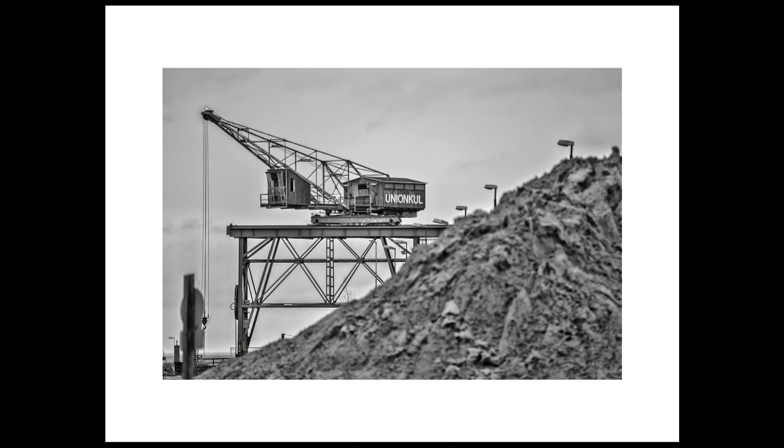Our own office started because we were biking around Copenhagen. Copenhagen is a very bike-friendly city. It's flat like a pancake, and we go around trying to sneak up on new places, what's happening, what's the potential out there. This picture is like four or five years old. And this place is the biggest industrial harbor we had in Copenhagen.

It's called the North Harbor, and all this shipping started to shift away. So it stopped as an industrial area like ten years ago or something. There's very little shipping going on here now. And in 20 and 30 years, all of this will be new urban development. So it starts down here, and you see the corner of Copenhagen in here.

You see the density of the residential areas in here. This will spread out over the next 30 years, with 40,000 people living and working out here. But in the meantime, there's this gap, there's this pause, there's this question of what's going to happen out here.

And what we did was that we called up a guy who's now our client, and we said, you got a shipping company, but no ship comes in anymore. We got an idea to put on your ground. He had a lease for the next 15 years on this ground.

We got an idea to put up temporary office buildings for the next 15 years. So instead of piles of rock and sand, you'll have creative offices put up there. And it sounded interesting for him, and it sounded interesting for the planning authorities of Copenhagen.

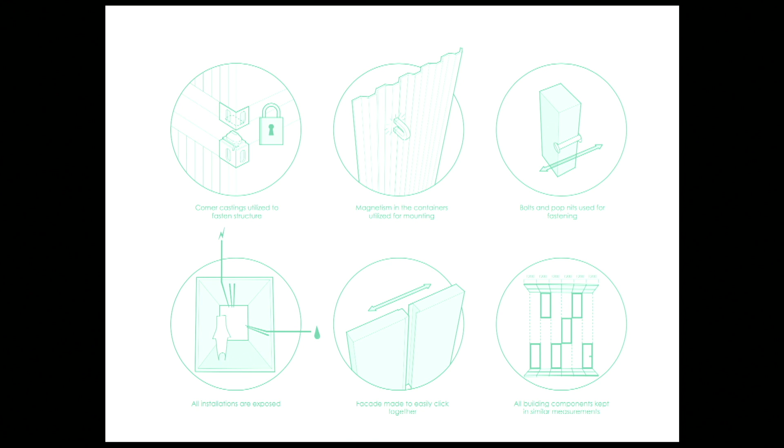Here are some of the features that we use. We use the already optimized interlocking system that you got. It's the same way you lock them on ships or on cars and trucks. We use the fact that it's all metal, so we got the magnetic features, so we can use magnets as mounting when we build. We bolt everything together instead of welding, so we can take stuff apart like a bike.

All installations, utilities, water, electricity are visible within the building, so it's easy to take up, it's easy to maintain, it's easy to take down, and it's easy to reuse. The facade is a click-on system. It's basically the way that you put up a wooden floor. So when we have to move the building, we can take it all apart without destroying it and reuse the facade again.

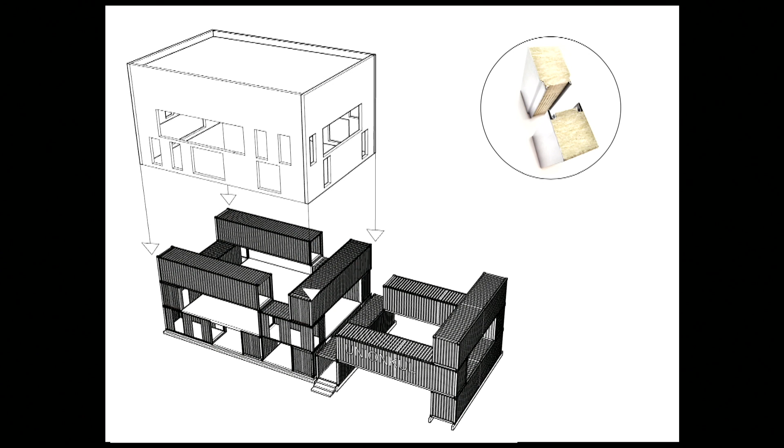And this is a picture of the building when it's the raw structure. This is basically how the whole of North Harbor looked 10, 15 years ago, only they are stacked in a little different way. And here is a diagram telling how the building is built up. So this is the stacking of it, and you have to think of the container as a load-bearing beam.

So this is how we get all our forces down to the ground, but the beam, like a steel beam, is so big that you can go into it. So it's also a room. And what we do in between the containers is that we put out a slab, like a deck, so we get big spaces in between, which is suitable for office spaces.

So we get big spaces where people can sit together and interact, and we got little spaces where you can have a one-man office, you can have meeting rooms, you can have quiet rooms, you can have the server room we got in here, you can have the kitchen, you can have the toilets and so on in the container.

And then what we put on up here is, this is a picture of our panel system. This panel system is made originally for refrigerated warehouses, so it's very cheap and it's very, very well insulated, so we get a very low energy consumption on the building, so it's very energy efficient, and it's very cheap because people only think it's used for warehouses.

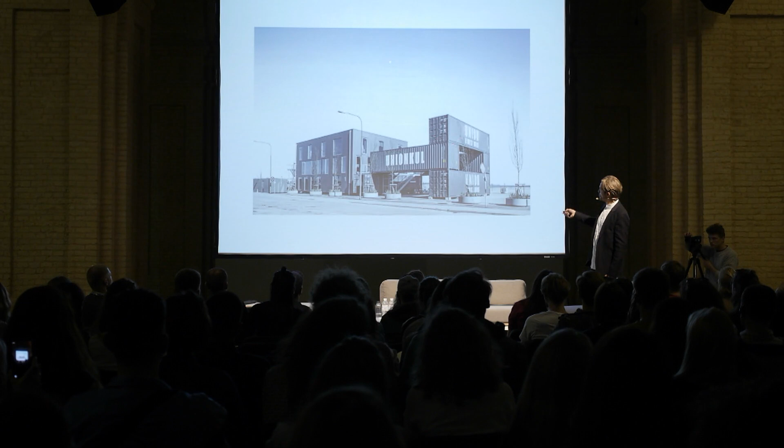And another thing is that two people put up a facade in a 3-story building in one day. So it's very rapid to put up and it's very rapid to take down. And this is a picture of the building when it was finished. So this is with the cladding on, and this is mainly like a show off. We use this for storage and whatever. And today, in fact, these two are insulated on the inside, so people also have offices in here.

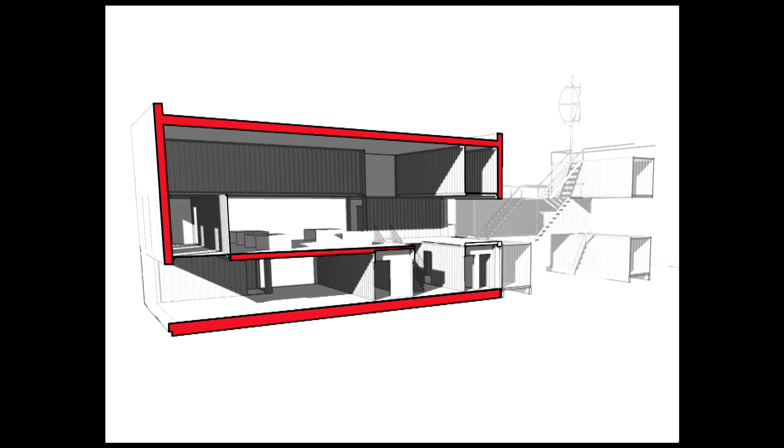But what is very important as an architect is not to be carried away with the system and what the system does, but to remember to make spaces that are lively, that are interesting, that make people want to go to work there, that give them joy in their life, give them a sense of meaning and inspiration and so forth. That's our first and most meaningful task as architects.

So what we did here is we tried to make different spaces, different ceiling heights, different cross views through the building. This is a section of the building. And I'll just show you some pictures from my everyday. I'm sitting up here. And there's another office sitting here, and you see the different ceiling heights. You see that we got a connection to each other, even though we're not the same company.

Within this, there's different kinds of places in the room that you can go. You got a meeting room in here. You got a quiet room over here. So it makes different kinds of moods in there. This is the common space, which is also the stairway of the building, and this shows how these different rooms and offices are interconnected with each other. So you have the feeling of the whole building as a living organism, even though you are only maybe a 2-man office or a 20-man office.

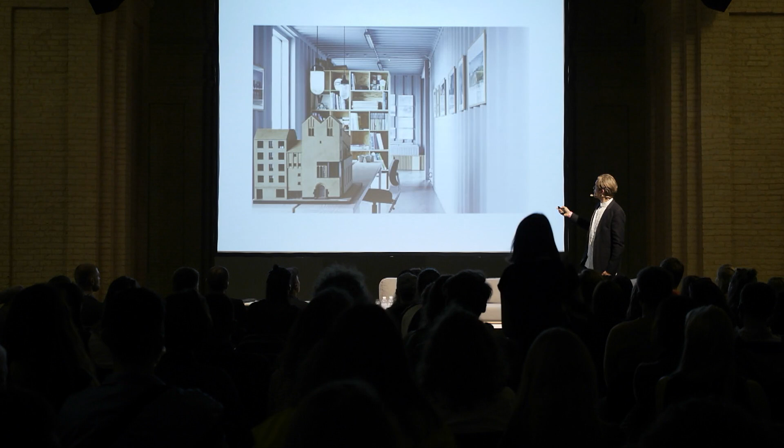And this is a room inside a container to show how it can be used. This is our model office, our model workshop space, and our small architectural library and stuff, and we have small meetings in here.

And now on the side of our Arcgency project, we have another project where we try to do these container offices as one-stop shopping. So it's a one-stop shopping architecture. Just like you shop for a car, you can buy a 1,000 square meter container office. So we have 5 different models.

You choose a model, you tell where you want it. You say, I want it in Copenhagen, I want it in Kyiv, I want it in Mogadishu, and then we tell you when you can get it and how much the price is, and you can get back to doing your work. And this company is a startup right now that we call DOC, and we got this slogan saying space as a product.

And this way of seeing space or architecture as a product, and the potential in that way of grasping it, came out of a joint venture with this company called VIPP, a Danish household supplies manufacturer. They do all kinds of things you have in your home, and they asked us to do a shelter for them which contains all their products, like their tables, their tableware, their kitchen,

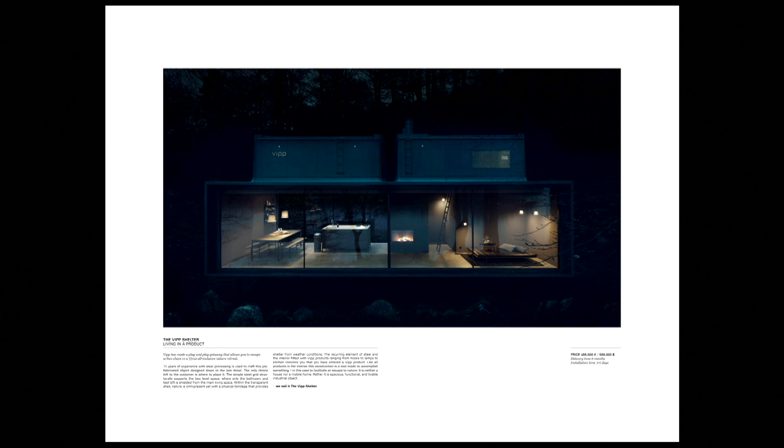their daybed, their lamps, whatsoever. And you can go to their website today and order this shelter, and they'll ship it to you and you have it in 6 months. And they ship it all over the world. So we spent 2 years with their head designer, Morten Bo Jensen, to make this project. So we drew everything in this. We drew every single bolt and joint, and everything is made by hand.

This is a little hard to see, so maybe I'll just tell you later. But the idea is it's a minimal building, so it's only 55 square meters. But the assignment was to contain everything you need to live. So it's like minimal living for 4 people. It's like the container buildings, it's floating above the ground.

So you go up a ramp here and you have the toilet in here. Then you have the leisure space, the relaxing space here with the daybed, a fireplace in here. You have the kitchen here and the table. And then all these sides are glass panels that you can take apart, so you can have the building completely open in these directions.

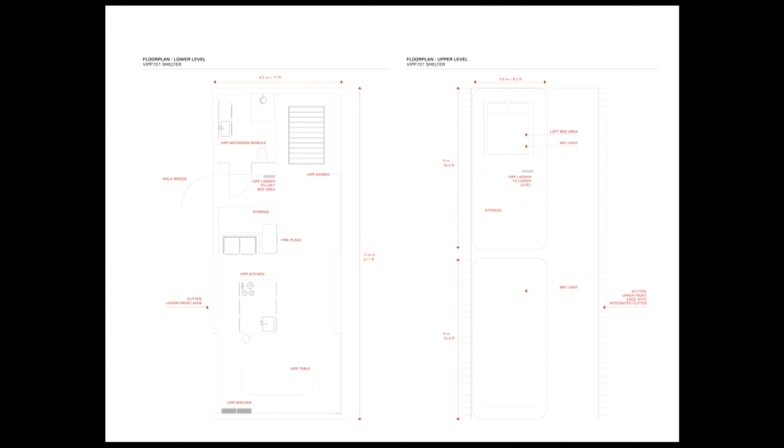And then when you go above the kitchen, there's a double height space which contains a skylight. And on the other side, there's another double height space, but here you go up a ladder, and then you got the sleeping area up here.

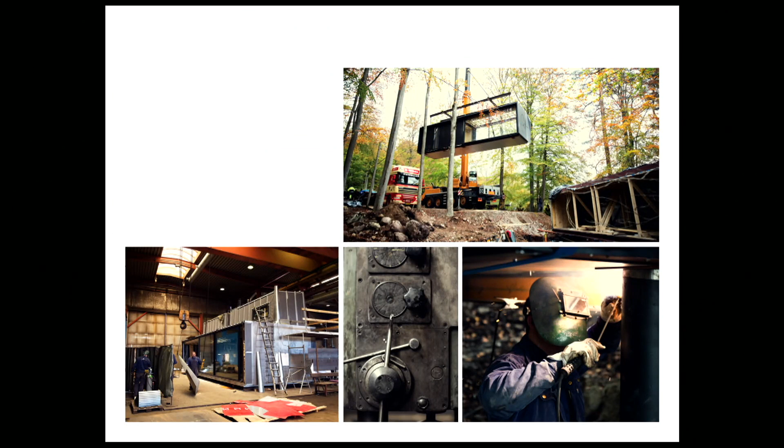The whole building was made in a steel factory in Denmark. So we made all the details here, and when you work with a blacksmith, your tolerances are millimeters. If you work with carpenters, it's centimeters. So you can have detailing here like if you had furniture or a product in your hand. So they made a very high detailing, and they make everything in the factory.

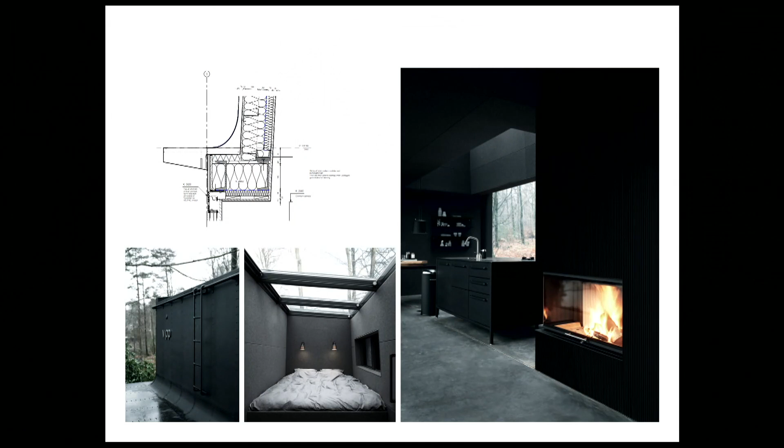They take it to the site, and it takes them 3 days to put this building together, and then you're ready to move in. And what this gave us was this opportunity to have a very high level of detail. So we made this ladder, we made this thing the ladder goes on, we made all these panels, we made the light. This is how we collect the water, so nobody sees the water collecting system.

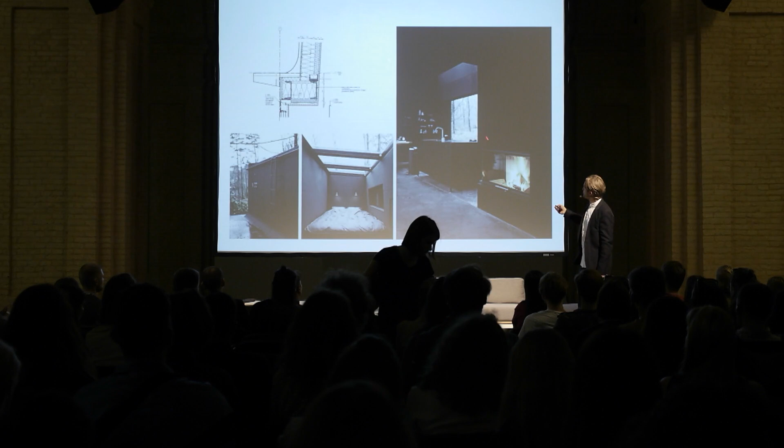We got the exact curve that we wanted on this to both collect the water so it doesn't go out and still have the aesthetics that we wanted. It's unfortunately a little hard to see here, but we made a whole panel here made out of steel with a profile that we came up with, because they just told us which profile you want, we'll just make it.

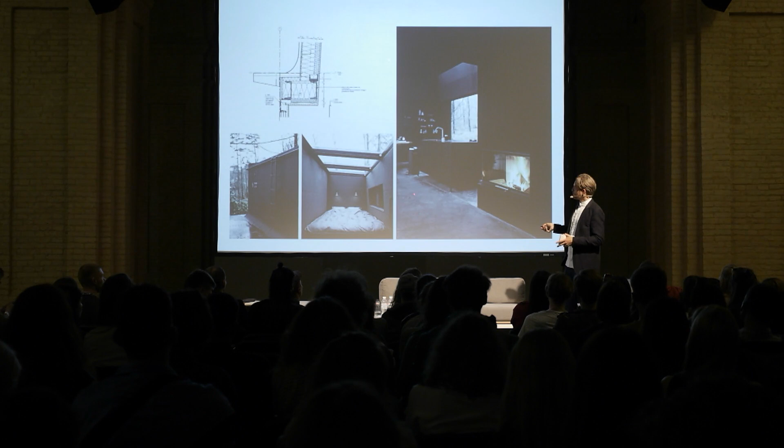So this is a steel profile we have here, but every other wall inside the building is clad with wool, natural sheep's wool. So these gray facades give you a very special light. Everything you touch with your hand inside the building is soft, and then you have the big windows which take the nature in and frame the nature, and then you have the concrete floor which is heated.

So this heated concrete floor makes it possible for you to walk around barefoot, even though it's winter and minus 30 degrees in Sweden outside. You can be inside in your bare feet, and your children can be on the floor. So even this very thorough design product can contain a very homely feeling, because it's so dense and so close and so basic in some sense.

So this is the family up here enjoying their meal, and you can see if you're on the bed, you can see the children playing over here, and one doing the dishes in the kitchen. So you're close to everything, and you're close to nature. And if nature is rough, then you got this very hard outside that shelters you. And when nature is friendly, you open up, and everything is accessible.

And again, this building has this sense of impermanence, that you have the permanent nature, you have the foreverness up here, and then you have this submarine spaceship-like thing that landed here for the amount of time that nature wants us to be here.

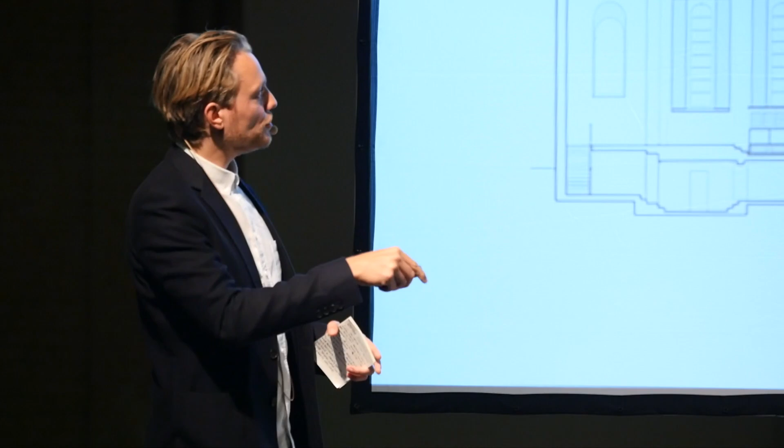Basically what we did was to see the middle of the church, take away all the benches, take them apart, reuse a lot of them, and then make a stage in here. So when you come in, you can see it all the way from the street. You can see that something new is going on in here, and when you're in here, you are like in the middle of the stage, doing your tricks.

And we had to work a lot with the sound, again, because we have 200 people eating common dinner here every day. We have people playing ping pong, people doing yoga in the same room at the same time. We have children, a kindergarten upstairs that comes down. It's a big pile of everything, and it has to work.

So we reduced the echo to 2.5 seconds, which is perfect for people talking to each other. It's perfect if you've got rhythmical music. So we have concerts in here, we have movie theaters in here. All of this stage can change during the day, like 5 to 8 times. During the week they have 50 different events in here.

We refurbished the existing church benches, and we hid all the appliances. The ventilation comes in around the floor here. The heating is in here. All of these are speakers, so you have the music coming out here, and you also have radiators and heating in here. Then we have these 6-meter high panels that we made in a factory.

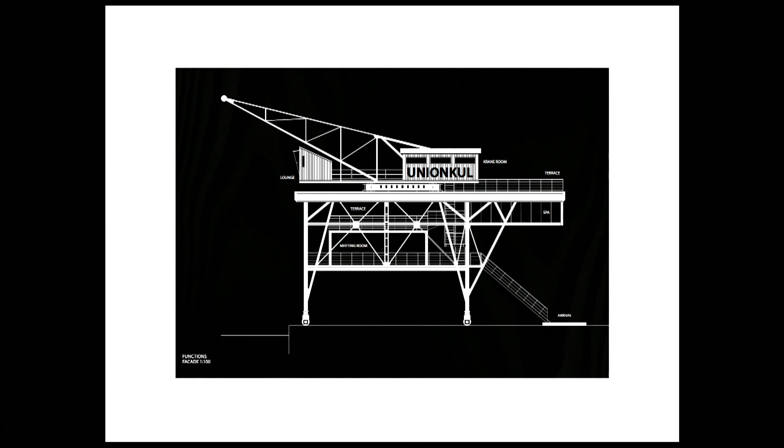And in the old crane track, which could move this way, back and forth, we built a meeting room in a glass box, and this meeting room is something that you can just go on the internet, you can buy an app, you can book a time in here. So everybody who works in the Northern Harbour or around it could book a time if you have a special meeting up here, and you can sit almost on the water having this meeting with special clients.

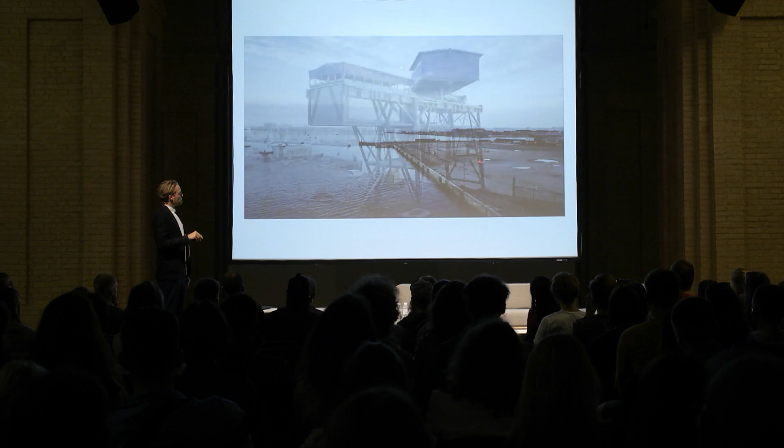Now I will try to see if I can show you a little movie. This was made like 3 weeks ago or so. And here you have the closed side to this side. This is only closed now because they are painting it or welding up here. But you can see from the other side that it's glass all the way through. This is up where you can see the sun going down. And here you see the industrial sense of how the harbor still is now. And you see all of this is glass, so you can look out, and then you have your little private space up here. And in a second, you'll see how the sunset is.

And again, this way of taking something that was supposed to be permanent, supposed to stand there as a crane for 100 years, and suddenly nobody used the crane anymore, and what to do with this, that way of thinking of the impermanence of a structure, putting new functions inside of it, is something that we generally use as a generator in our work and how we like to approach the city. And you can go to our website to see the follow-up on that.

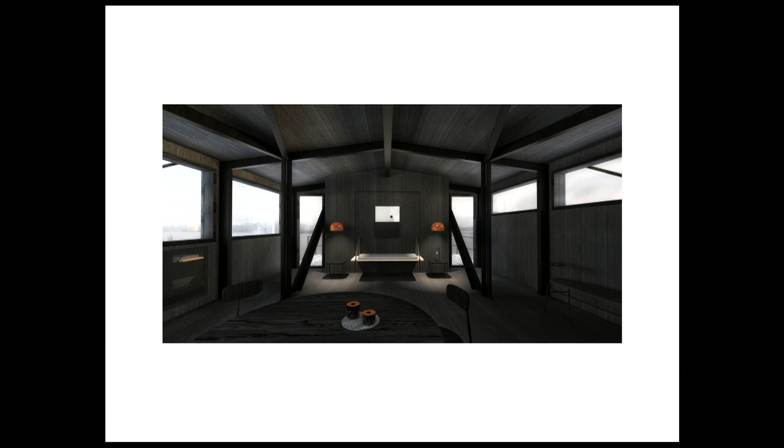And this is a rendering of the hotel room. When you are ready to sleep, you have a Murphy bed you take out of the wall. And the whole interior is black oiled wood, so you have the sense of this oily old machine-like feeling in this very small closed room. And then you have it as a very big contrast to the living space outside, or it's like living art looking through these frames of the window when you look outside, and you have the sky and you have the sea.

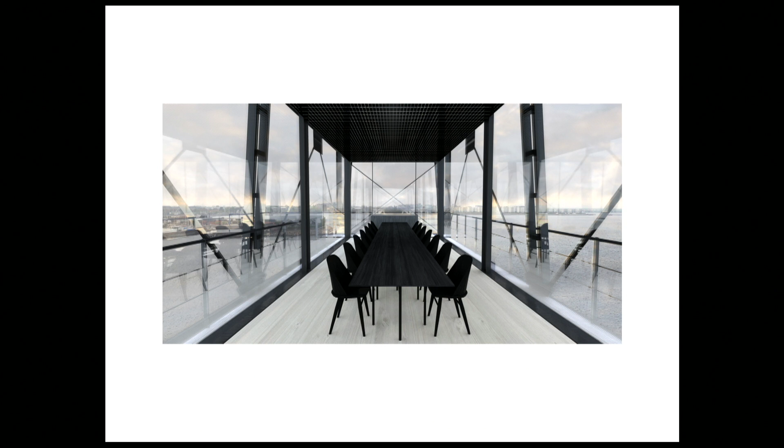And I will encourage you to do the same. Try to see how you can change the program, how you can change the building, how the buildings can be like impermanent, so it's not that hard to do. You just go out and do it.